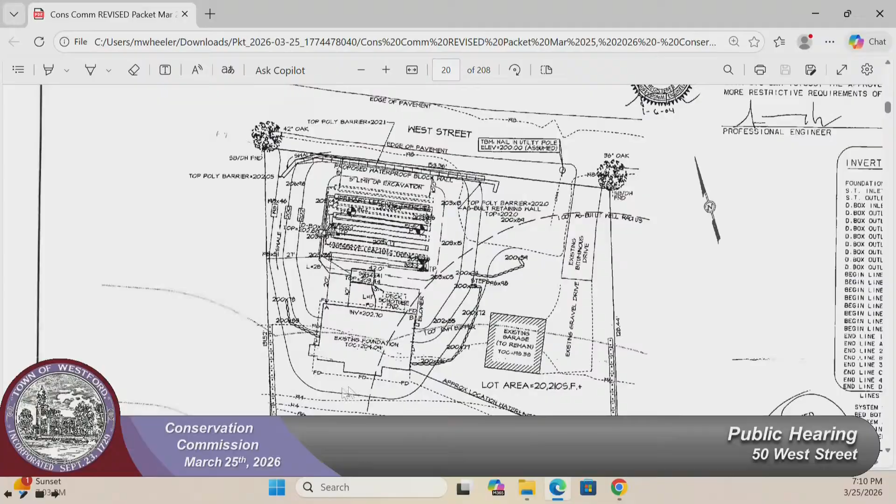Okay, so I've got the plan up. It's about 55 feet for the buffer. What is this line? Is that the 100-foot line?

I don't have that — this is the 100-foot line. Let me see, hold on a second. The 100-foot line looks like it goes up through the garage. Yeah, so this looks like the 100-foot buffer. Oh yeah, okay.

So currently, right now, in the back of the house there's a small landing with a set of stairs coming down. The proposal is to add a small deck, a little bit bigger than a small deck, on the top side, using helical piers instead of digging with concrete footings.

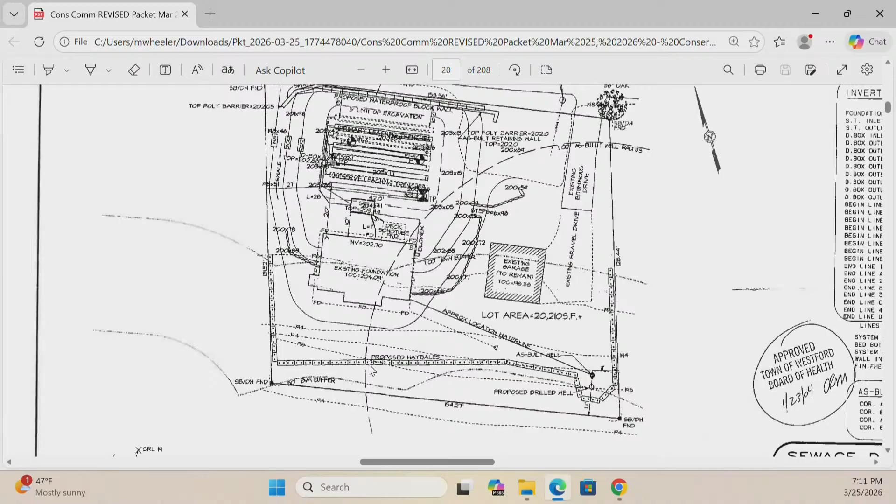So it's the least amount of disturbance to the ground as possible. Is that the 50-foot buffer right there? That's what it looks like. So he's well out, like 20 feet out, on maintained lawn right now. Yes, it's just lawn, and that's not gonna be disturbed. We're not gonna put anything there, no gravel, nothing like that. There will be a small pad for the bottom of the stairs, that's it, a concrete pad.

In terms of what will be underneath the deck from a ground surface perspective? Just grass, okay. Where will the building materials be staged? And the driveway, which is in the front part of the house. Had Matt talked with you? You have the proposed hay bale, so you're all set there. I don't believe we're gonna have a dumpster because the product is minimal. So we'll be getting rid of that, so that'll be one less thing.

Any other questions from members of the audience? No. Sorry, any members of the commission?

It's not really a conservation one, but I know that in the back of the library, the stairs that go up into the main entrance to the library don't meet the code. I'm wondering how many steps, or what kind of height on the stairs? The stairs are 7 1/4 on the step, so the maximum step could be 8 1/4. We're at 7 1/4. No, I mean the total height from the top, or the number of steps? There's 12 steps.

Right, but it's the height—there's no height shown of how high the deck is from the ground. And there's no landing on the stairs. There's a landing at the very bottom. But there's no landing for a turn, so you have 13 or 14 steps. There's 12 steps.

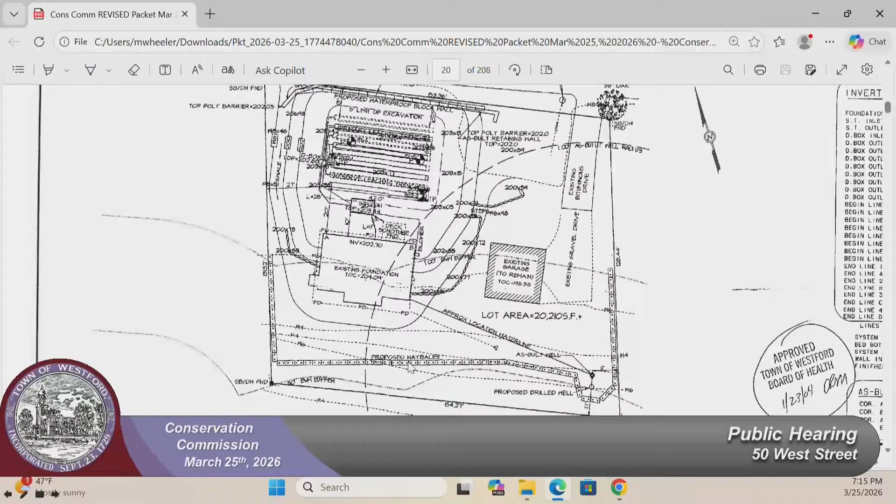And currently there are steps there, and we're just basically reproducing the same steps—the same amount of steps, things like that, that's currently at the house. We're just bringing the deck forward, and the steps will be coming in front of that structure, so it'll be going into the deck more than it is currently.

Are there any comments or questions from members of the audience? No. Let's see.

So you're looking for a motion to approve? I'm looking for a motion to issue—I just don't remember whether this is a conditional negative or just a straight negative. Jim, when you write it up, was this a conditional, or was this a straight RDA? Okay, straight RDA. Can I have a condition? The only thing I'm gonna write about it—the silt barrier's already there, yeah.

Okay, and we can do that—we can put the straw bales there, the swales, or the silts. They're on your plan already, right? I'm not sure if they're on the plan. Well, it's shown here. Proposed hay bales, yes. From the old plan, maybe. They're on your plan, yeah. Let's see if Matt's given me any conditions.

Okay, so I would say there are no conditions listed, so can I have a motion for a negative determination? Okay, so moved.

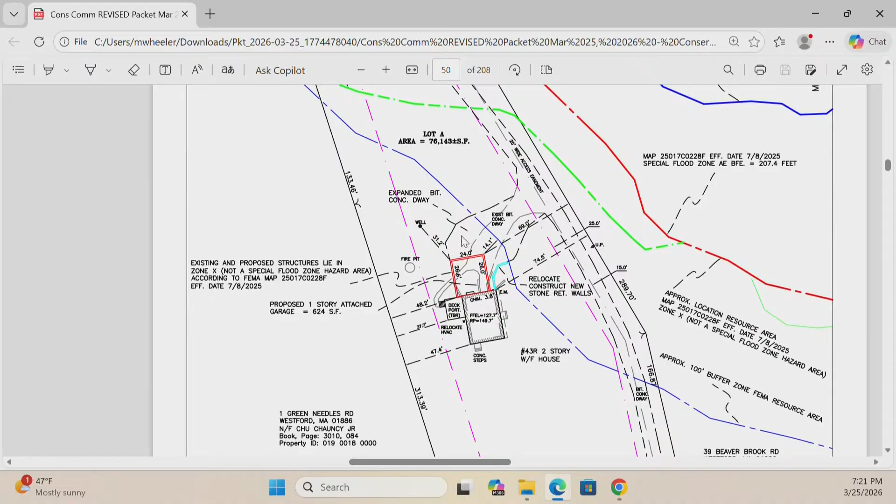Okay, so it's the changes to your driveway rather than the building construction itself that is the reason for the public hearing or for the filing? Correct, yes. It's just the extension of the driveway, and the driveway will be extended into previously disturbed land, which is currently a lawn. Okay.

And had Matt discussed any conditions with you regarding, for example, putting up erosion control or anything like that? Yes, so we will install erosion controls such as silt fencing during the construction and maintain it until the site is stabilized. Okay.

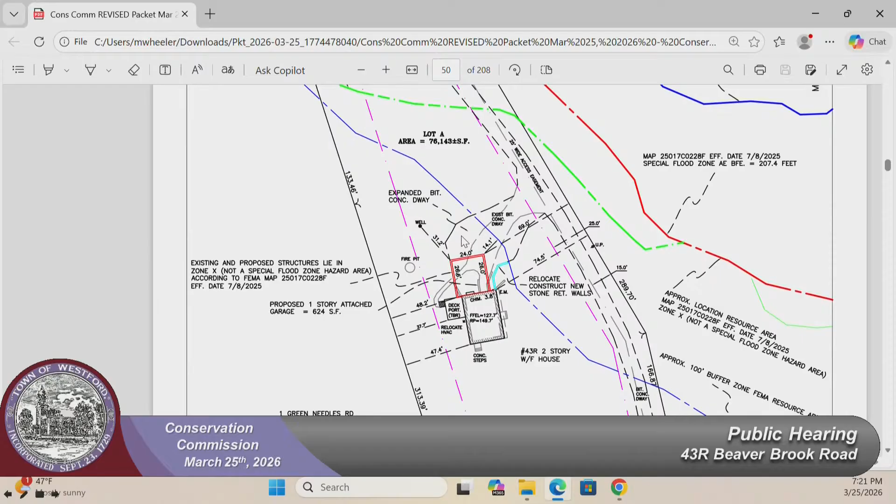Are there any comments or questions from members of the audience on this project? Where are these erosion controls? They're not shown on the plan, but what we could do is if we issue a conditional negative determination, then Matt would include the condition for erosion controls to be installed and inspected prior to the work beginning.

Okay, so can I have a motion to issue a conditional negative determination? So moved, second, all those in favor? Aye. All those, may I have a motion to close the public hearing? So moved, second, all those in favor?

Aye. Okay, so Nicholas, Matt will be in touch with the paperwork. That's great, thank you very much for your time and consideration. Thank you very much. Thank you as well.

Jim, can you click the end call button on the phone, please? Thank you, have a good evening. You too, good night, goodbye. Okay, I think I said goodbye. You're not there anymore, right? All right, good, it's all right, it's all right. Okay.

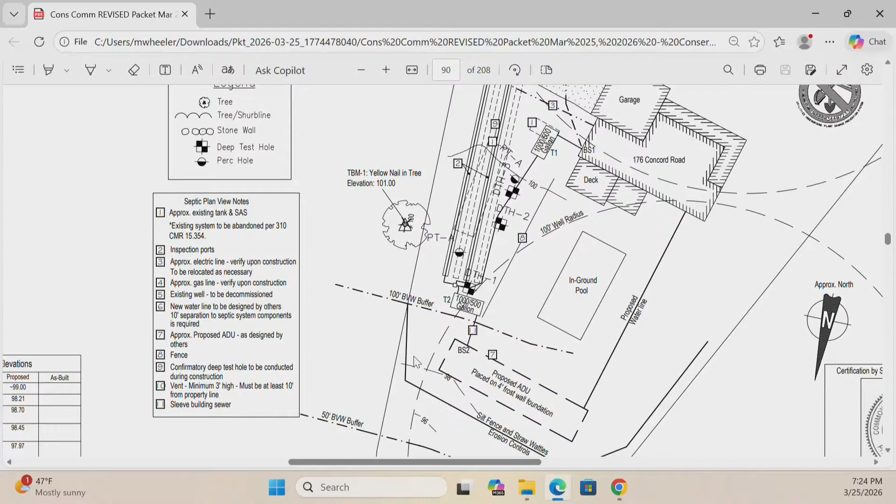What we have is a notice of intent for the construction of an accessory dwelling unit at 176 Concord Road. I went out and delineated a bordering vegetated wetland, which is essentially the lot. It's a triangular shaped lot. There's a large swamp behind the property. Where the lot comes towards the swamp, there's actually a steep slope, and the wetland is down at the bottom of the slope.

You can see, I don't know if this thing works. Is this a pointer? Yes, it is. I don't know if it works. If it works, there's a green dot. Yeah, I saw the green dot, I just don't see it on the screen. Oh, there it is. Okay.

So we have the bordering vegetated wetland here. We have your 50-foot buffer zone here. We have your 100-foot buffer zone here. This line right here is an erosion protection barrier. There is a detail on the plan showing wattles and silt fence that would be placed as the erosion protection, going around the shape of the work.

The septic system, with the exception of a small section of the main going out to the tank, is out of the 100-foot buffer zone. Here is the leach field. This septic system has been approved by the Board of Health. The condition they put on it, probably in connection with a comment Matt made when we reviewed the plans together, was that he wanted this area sleeved. So the Board of Health permit requires that main be sleeved, which would provide extra protection against any leakage within the buffer zone.

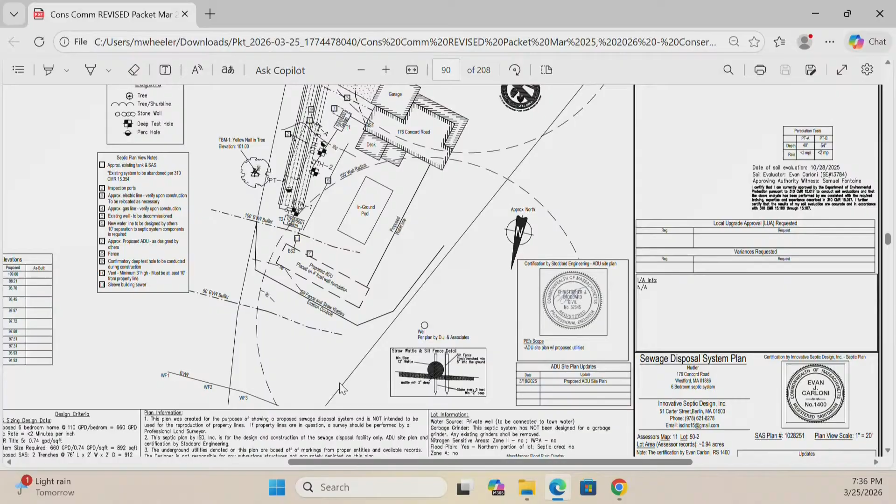It's not really—also, I'd remind you, this square right here is an in-ground pool. So now you're tweaking the ADU up closer to the pool, and it creates more issue than what it would actually resolve. Actually, how does that create an issue? If I bring that proposed ADU closer to the in-ground pool and outside the 100-foot buffer, I don't see what the issue is, other than aesthetics.

How do I put a porch on to get into the ADU? Well, right now, I can see this ADU being moved up out of this 100-foot area and being connected into the septic line without issue. That way it meets our regulations. So that would be my recommendation.

So from the pool to the ADU, you got about 12 feet. The ADU to the first box - that pipe can't be more than 12 feet long. Isn't it 30 or 40 feet long? No, it can't be more than 12 feet long. The ADU is 16 feet.

I don't see why he can't move the ADU up and bring that pipe right to it and be outside the 100. I guess that's what I'm missing. Is there an offset that would require the structure and its slab to be a certain distance from the septic or the leach field?

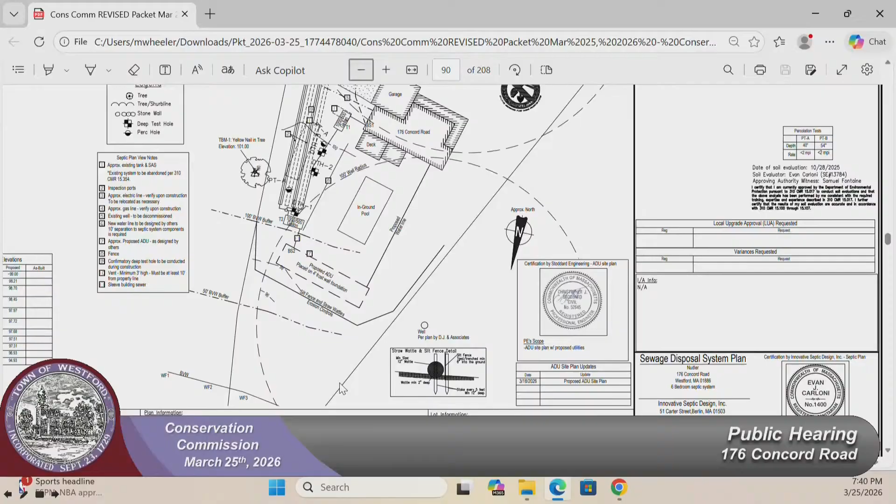So you're saying the location of the ADU meets the required offset from the in-ground pool to the structure? Correct, and the required offset from property lines, but again it's very close. If there was anything we had to move, that's going to be a discussion. This is why we brought Eric, our general contractor, here as well, to give insight, because he's the expert.

So on the left side of the building, according to the existing plot plan and where they want to put it, the setback is 15 feet - they have 15 feet 1 inch. So this is 15 feet 1 inch here. On the other side, I believe it's 15 feet 6 inches.

Because she's right, the property is shaped like a cone - the farther back you get, the tighter it gets. So for the offset for the pool, and for the offsets to meet the current town code, that's exactly where the ADU fits - it's the only place it fits.

And you said the offset from the pool to the ADU had to be 10 feet? It has to be at least that. Okay, so when I'm looking at that - I don't know if this is to scale, 1 equals 20 - but if I simply slid this up to the corner, so this corner was outside the 100, so you could hook it up.

To me, that almost seems like you've got your 10-foot offset, and then you're sitting on top of the tank. Then you'd have to move the tank around, which means you'd have to move the leach field. The tank - so you start moving that stuff up to get that line out of there, you affect the placement of the tank. Oh, so that's the septic tank.

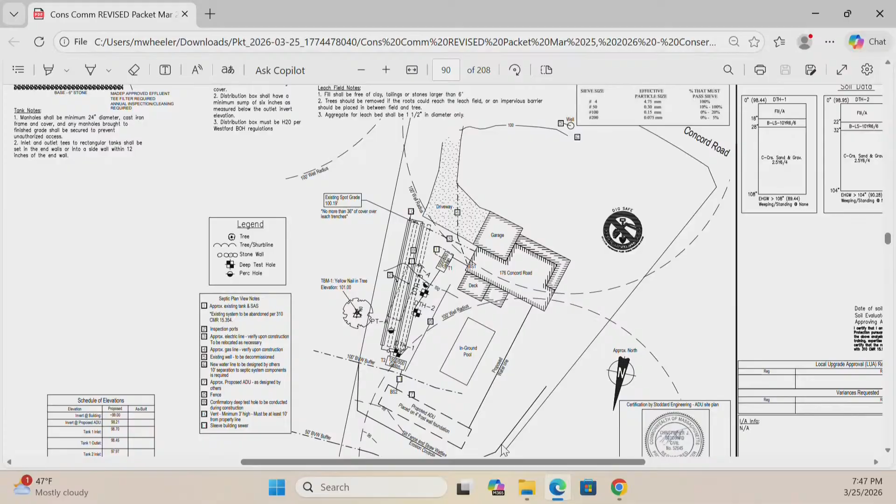No, I'm talking more about the times we've done components of the septic system inside the 100-foot buffer, and it's usually been a septic replacement. So yeah, it's usually maximum feasible compliance for an existing structure, not a new structure, as is the ADU.

Typically we would have narrative stating there was no other place this could be put, and this is why the ADU had to be here, and why we have to provide relief or accommodation. So what you're saying is it would be helpful to have a write-up of all the steps they took trying to locate it elsewhere.

A narrative of all the other places, basically an alternatives analysis. A narrative of the steps you already took to see if there was a way you could have it outside the 100-foot buffer. It's a rationale, pretty much everything you said.

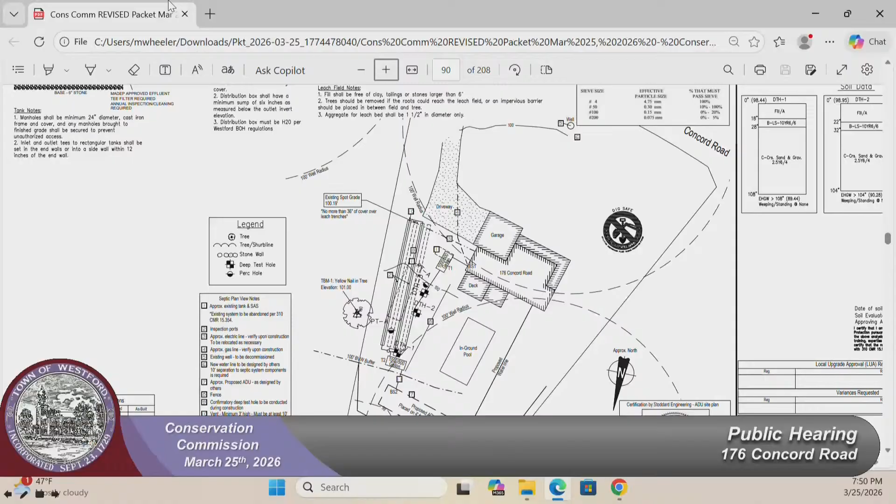Which means you do have room to move this up without getting closer to the property line, and it leaves more room here, so if you wanted to, you could move the ADU closer. Moving the ADU closer increases this distance, which you said was a concern, and increases this other distance by another 6 inches, which is also a concern. So I think, given that well is going away and that 100-foot arc is also going away, you have the room to move the septic system south, parallel with the property line, and then move the whole ADU that distance, staying out of the 100-foot buffer completely.

That would have to be something I'll ask the experts about. I'll review that with Mr. Carloni.

That's appreciated. I'll review that with Evan, the septic designer, regarding the elimination of the well. I'm sure he took that into consideration when he designed that system, but there's likely an underlying reason why it's there, regardless of the decommissioning.

We'll find out at our next meeting. If that's so, it could be in your narrative. Agreed, we're all on the same page. So you would have done due diligence in checking it out, and we'd like to have that paper trail as part of the filing.

Because next week somebody might ask about this, and a year or two from now, elections fade, people come and go. If we don't have that narrative as part of the file, we're in trouble. With my commission, I like to say if we get hit by a bus the next day, we'll have a record of what really happened. It might be a little painful, but it'll work through.

So I don't remember whether I asked, so I'll ask again: do any members of the audience have comments or questions on this project? No. Okay, so we would continue to our April 8th meeting.

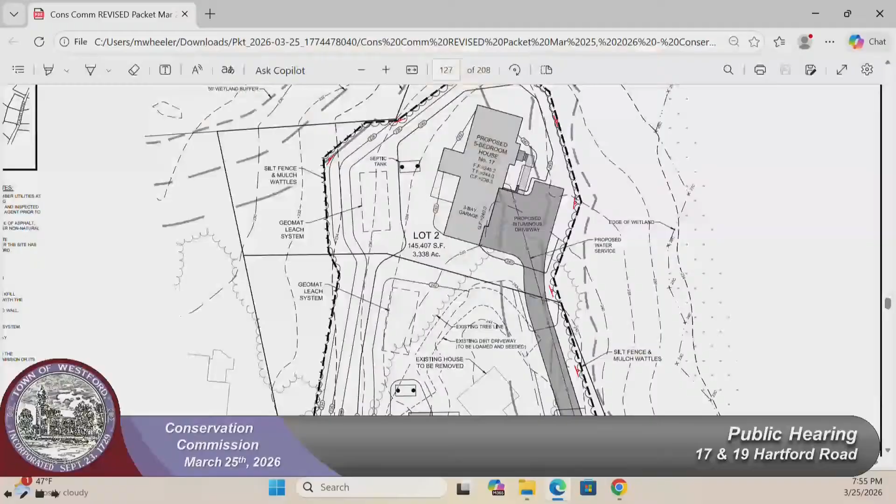Good evening, Mark Slager from Alan Engineering, here on behalf of Premium Homes. You may recall we were here last fall requesting a determination to demolish the existing house at 19.

And the thing here isn't working. I think Matt wore the batteries out. You want to borrow mine? Oh, you have one, all right. Which button? The red one. There we go, so this is the house. If we had a bigger screen, we could scroll down to Hartford Road.

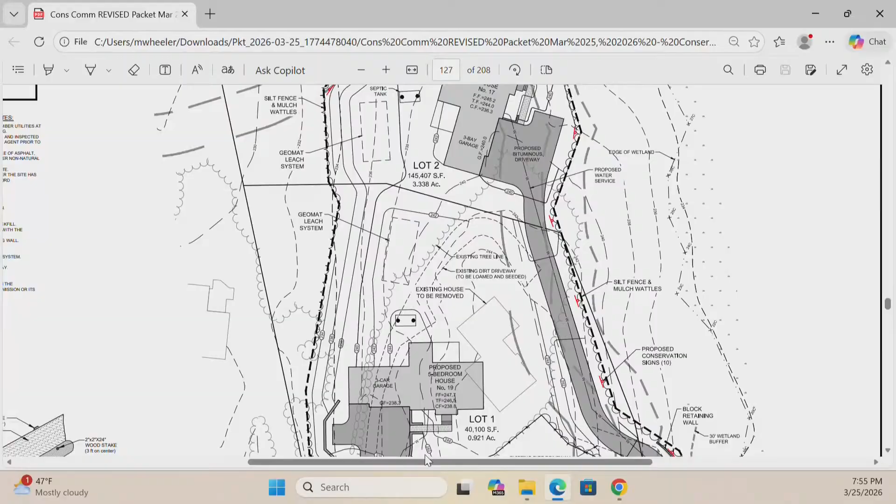So we have an existing house right here at house number 19. There's an existing driveway up and around right through here, and another existing driveway that goes off into this side of the house. Both were actively used when the house was occupied.

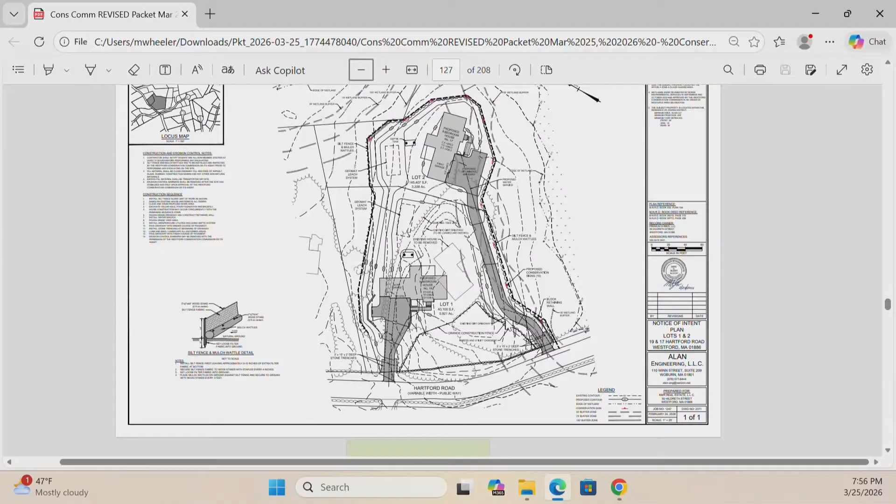What we're proposing, we did an ANR plan last year, possibly the year before, carving out 2 lots. We've got 200 feet of frontage for each lot, so we meet the zoning for each lot.

What we're proposing is to construct 2 new houses after demoing the first house, using the existing driveway for each house. There's an existing driveway here and here. We're utilizing that as much as possible, then creeping onto the lot so we maintain the 50-foot no-disturb buffer, shown by this dashed line, for construction of this driveway.

In here, where it's already an existing dirt driveway, we will be within the 50-foot buffer, but it's previously disturbed, so we meet the 30-foot setback, which is right here. We'll quickly get outside the 30 and then well beyond the 50 out to here to service the house.

The septics for each house is one septic here and another septic here. Both will be served by town water. Currently, this house is on a well that will be decommissioned, same as the septic tank and septic system, which we believe is over here.

We don't really have great records of where it is, but during demolition of the house we will recover the location of the tank and decommission the system in accordance with state and local regulations.

There'll be a new water service coming in off of Hartford Road up to here, and another coming in following the driveway up here. We'll also be using underground electric for the first house. I believe there's overhead electric already on this one. We're not sure whether it'll remain overhead or go underground here as well.

The total disturbed area is just under an acre of land. So we have the silt fence around here, and in the front yard we have orange construction fence that will go in here just to make sure we don't disturb more than an acre.

We've had this situation in one other filing where the tree clearer wasn't as careful as he should have been. So we're proposing orange construction fence, and I'm going to go out and stake that myself, or stake out where it goes and inspect it before they do any work, just to make sure we maintain under an acre of land disturbance.

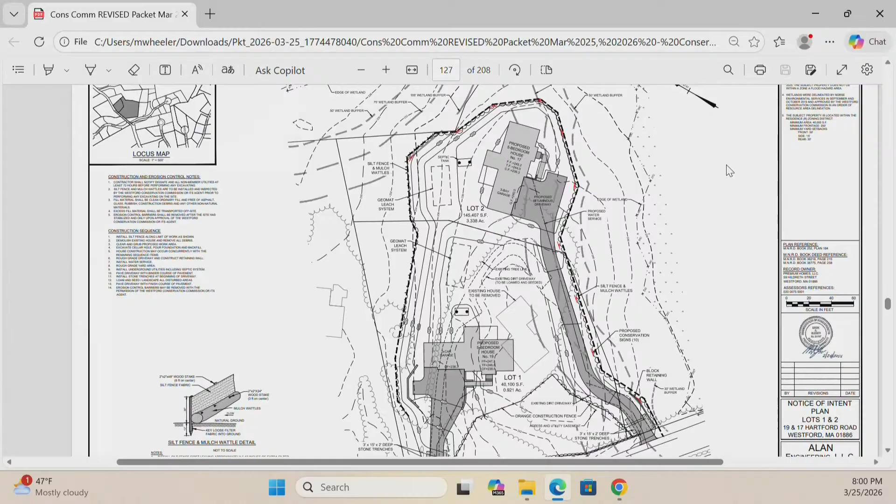Now, how densely is that wooded? Is that larger mature trees, or more understory? I think it's a mix of both. It's mostly mature trees, but there is some understory established as well.

Is there any plan for replacing any of the trees, if that's what the commission wants? Yeah, I don't know. I mean, we'll probably do some additional plantings.

This is the 100-foot buffer right here. Most of the work is going to be outside the 100-foot buffer. So we've got a 75-foot buffer here and a 100-foot buffer right in through here. This is where most of the tree clearing is going to occur. Out in here, we're outside the 100-foot buffer.

That's why I only asked how many inside. Can you get a count? Can you get a count? Sure. Well, what's the minimum caliper you want them to count?

Well, in looking at how close the tree line is to that driveway and portions of the dwelling as well, you have to wonder if that's going to come back to us later. Is the developer fine building that close to the large trees?

But the homeowners might have an issue later on, especially thinking about this past winter and the health of large trees. I think the way to handle that would be, once we get the erosion controls staked out, Matt and I could walk it, possibly before they put the silt fence in. And if we need to go around some trees and move the driveway further away from the wetland, we do have plenty of room.

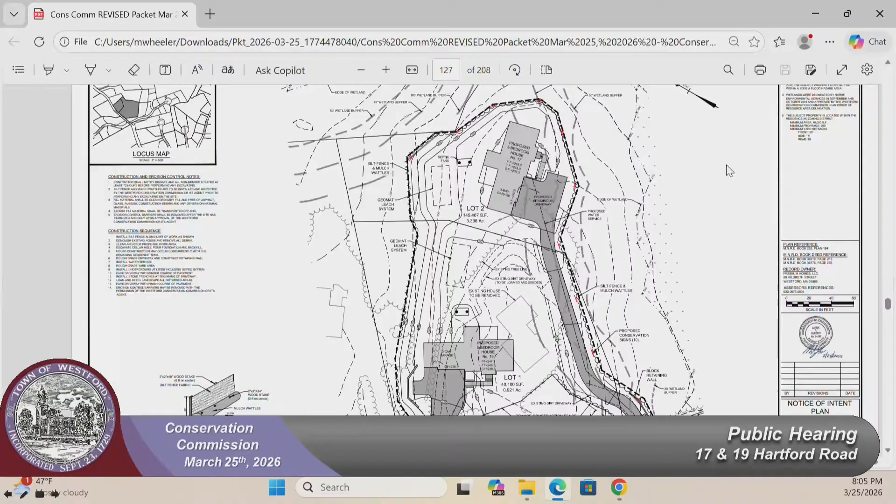And then I provide an HDPE barrier. That way you don't have to go 15 feet from the system to start your slope, you can go 5 feet, so you save quite a bit of fill on the downside. These are basically a 1-inch thick mesh with a sleeve for a pipe to go in, and the leach lateral disperses through the mesh and then goes into the sand. So the mesh actually replaces the stone.

So if you had to replace it, you would simply pull out that system and put another geomat in? Yeah. And these systems, in order to prove that you can use a geomat, you have to prove that you can fit a conventional system on the lot with the same capacity. So there is room to put a conventional system in. I proposed a geomat because it takes up less space, there's less clearing.

Life expectancy is kind of the same equivalent between this and a typical system? These are about, I think, 40% smaller in footprint. About life expectancy, I don't know if they've been around as long as the stone and pipe systems. It's more a matter of the soil, and the soil here is pretty good, like 3 minutes an inch, 5 minutes an inch.

And it's more a matter of maintenance too. A lot of times people use more water than the system can handle, or they put in a garbage grinder, and then when it fails, they take it out. No problem, just, yeah, I was curious.

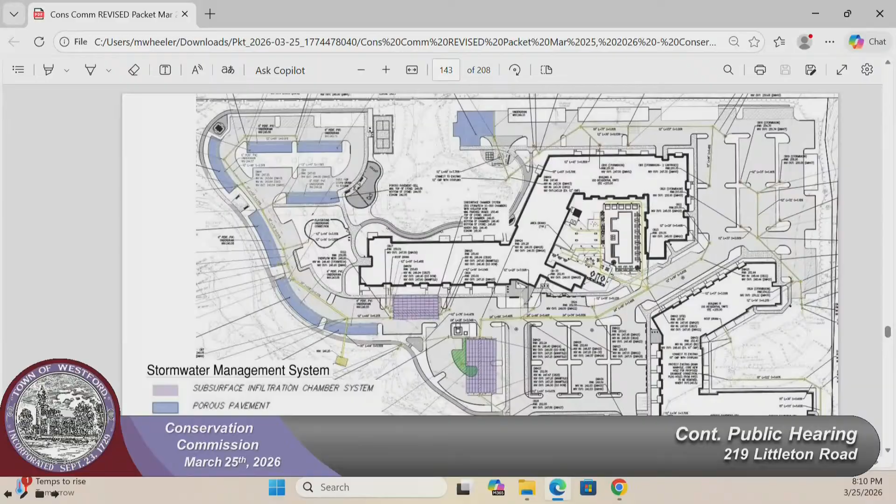Okay, so I'll do an overview of the stormwater system again, just to remind us all about the design, and then I'll talk a little bit about Tighe & Bond's peer review and where we've gotten so far with that. A reminder that this site is a redevelopment under the Massachusetts stormwater standards. That is because the project will decrease impervious area. We have about a half acre less of impervious area in the proposed condition than we do in the current condition. That does not take into account the areas of porous pavement. For the purpose of our design, we considered those to be impervious, so we went kind of conservative there, and we didn't account for surface infiltration in our model.

So there are several components of the stormwater system, which was really designed to fit the constraints of the site. As you know, this is a very wet site, there's a lot of wetlands on the site. Related to that, there is high groundwater. So that kind of put a limit on what we could do for stormwater recharge BMPs, just because of the vertical depth available. So where we could, shown in purple on this plan, we have systems of underground chambers.

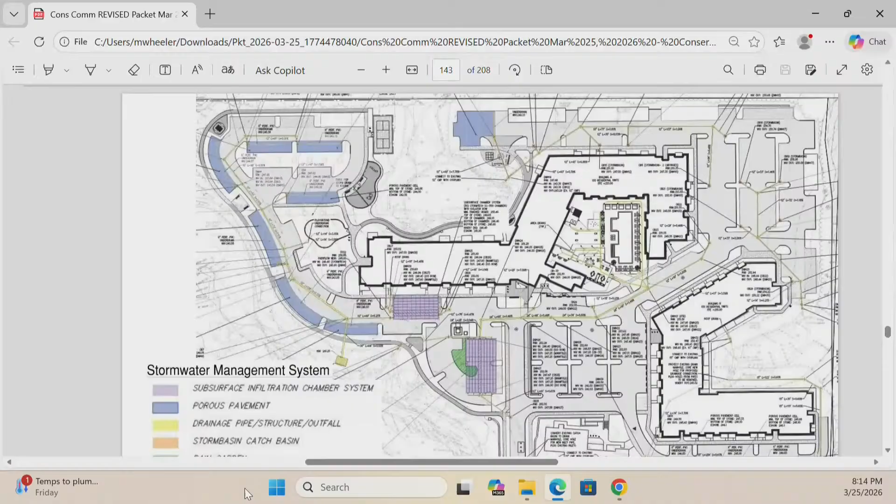We do have a rain garden proposed in green, which is here. We located it there because we could. The other landscaped islands were either over the proposed effluent field, or in areas with mature trees or steeper slopes. So we put the rain garden where conditions were allowable, so that's the traditional planted rain garden. There'll be surface runoff into that, and overflow from the rain garden will drain to the chamber systems.

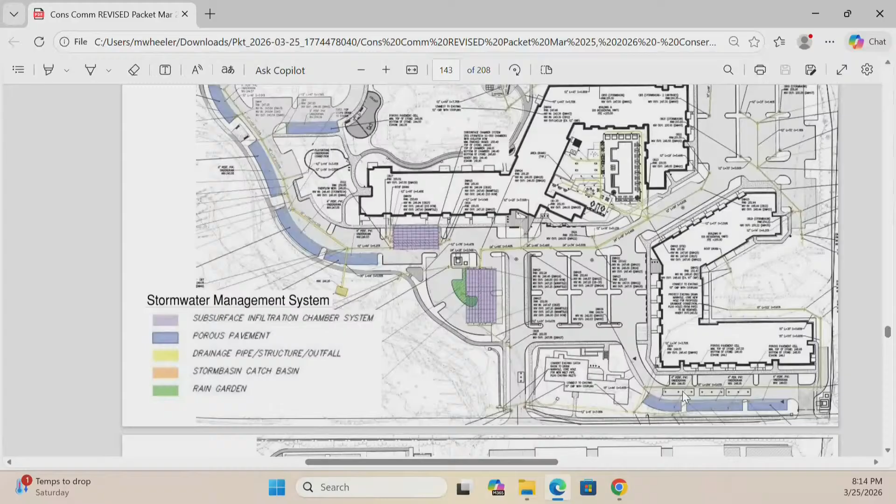Lastly, in the upper right corner of the site, this is where we have the highest groundwater. In that location, we weren't able to get the separation to groundwater under porous pavement there. So what we did is provide catch basins with filtration inserts. Those filters can address the needs for phosphorus and nitrogen removal, as well as total suspended solids. They're a little hard to see, but those are the orange dots up in this area.

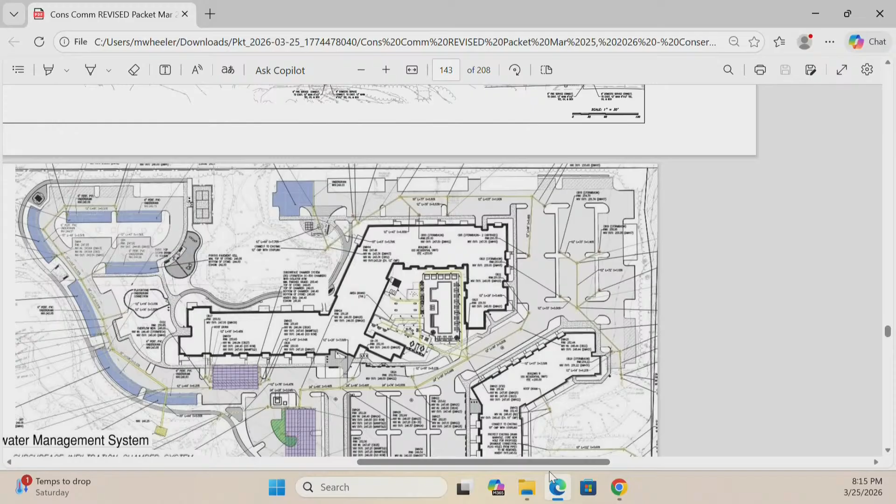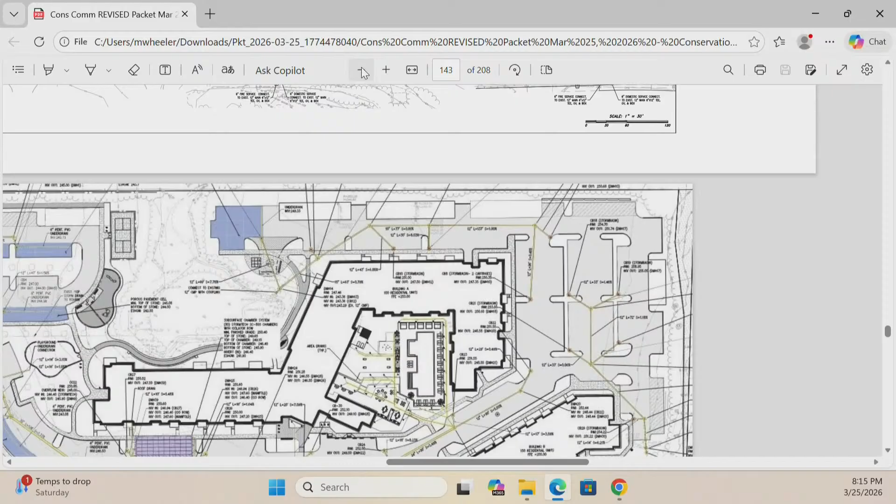We designed the system to try to mimic the existing drainage patterns on the site, so we tried to approximate about the same amount of water that goes to each wetland. We divided up the site intentionally that way so we don't alter the conditions of those wetlands. The three wetlands are connected — the one on the Cornerstone side and the one central to the site have existing piped outlets to the wetlands associated with Vinebrook.

I'll talk a little about Tighe & Bond's comments. We met with them last week and had a very productive meeting, and we're able to address all of their comments on the stormwater system. Some of those were providing more clarification on the site conditions, such as groundwater and subsurface soils. We will be adding a few drains at their suggestion. We also adjusted our stormwater model to reflect a larger storm event — they asked us to use slightly different data than we had been using, which bumped up the inches per storm by about a quarter inch for each one. So our system is able to accommodate those.

So that's it for stormwater. I'm happy to answer any questions you might have on that before we move on. Any questions on the stormwater?

One of the things that's important is that pervious areas require maintenance so they stay pervious over time. How do you do that? What actually happens to remove the silt and sand that clogs up the pores? One thing is being careful about what you put there — these areas would not be sanded, but they get vacuumed periodically. It's a vacuum system that pulls out the dust and dirt.

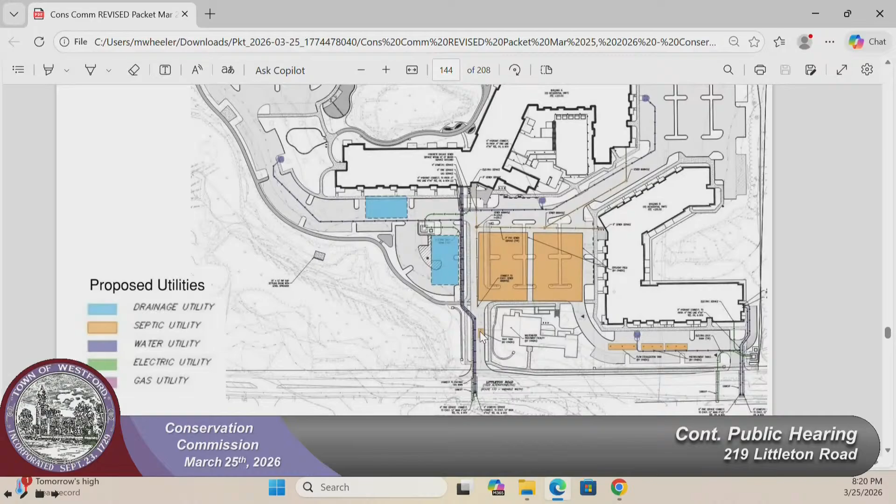I think we talked a little about this. There will be an on-site wastewater treatment facility. The site conditions for that have been approved by DEP already, and the design for that system is underway. It'll generally be in the location shown in orange on this plan. These are tanks related to the system here and here, and these larger orange rectangles are the effluent field. When that design is complete, we would provide that tie-in bond, as well as having DEP go through their approval process for that.

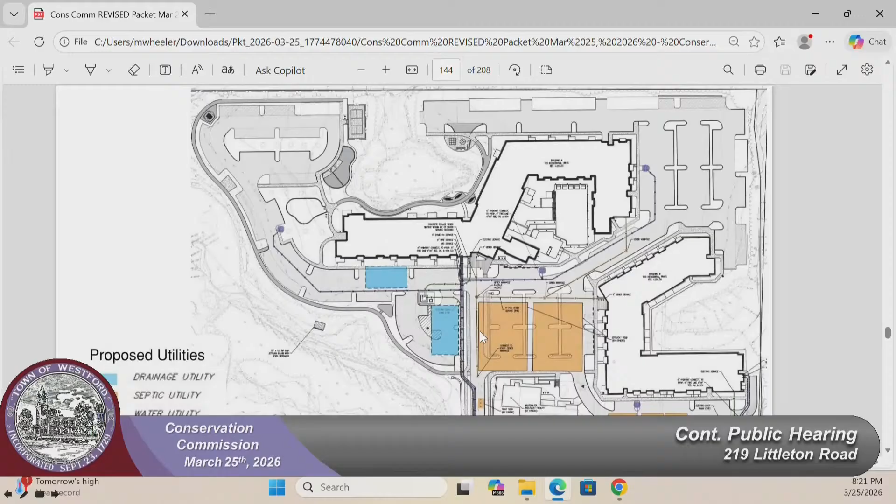We have water and electric services coming in from the street, like you'd see for typical projects. One run of services is through here, with a transformer over here, and the second run would come into this building over here. So nothing too exciting about utilities on this site, pretty straightforward.

Ready for me to move on? Yes. Okay, which slide would you want me to go to next? This is good. Okay.

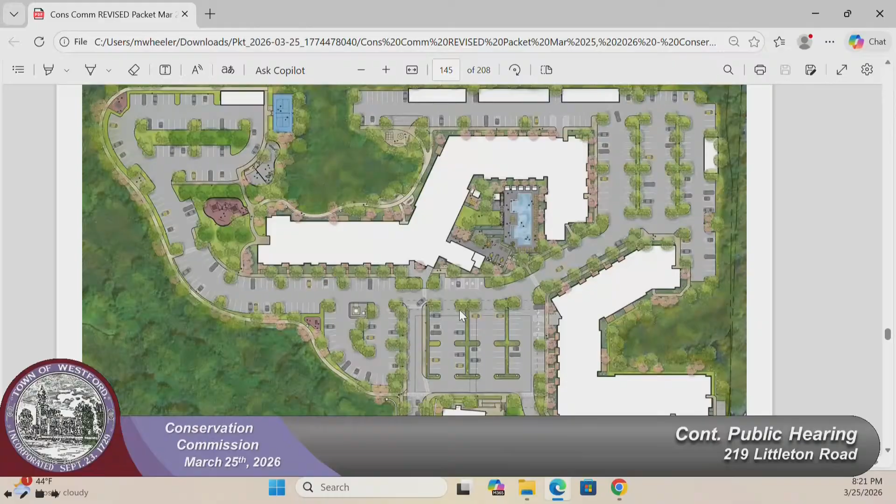I'm here tonight to talk to you a little bit about the architecture and the sustainable features of the project. And this is our rendered site plan.

Just for the record, can you remind us who you are? Yes, my name is Bridget Doherty, and I'm with Arrowstreet. I'm the architect and project manager.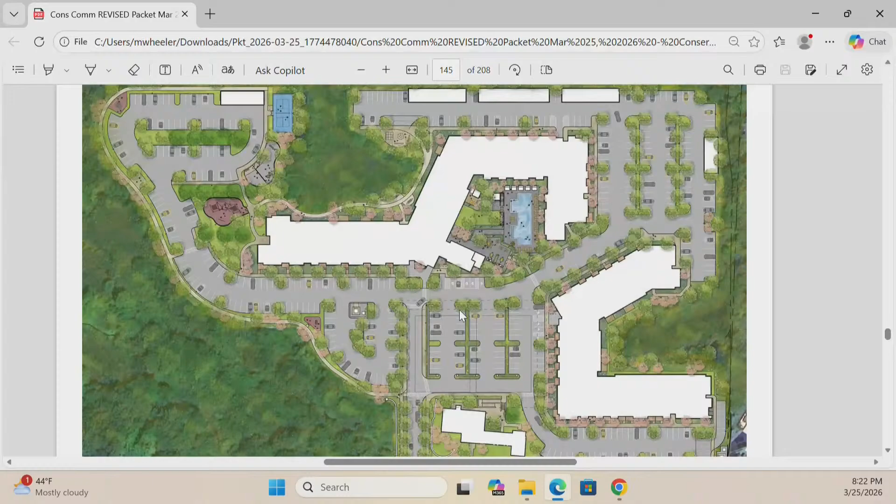Thank you. As you can see from our plan here, the buildings have been designed to really weave around the natural features of the site. They're designed to preserve and provide breathing space to the wetlands, preserving the groves of old growth trees we have in the northwest corner here, and preserving the really important trees on site. The buildings have been organized to provide as many views as possible for residents out to these resources, to the wetlands, really along the backs of the buildings, opening up to enhance and express the value of those spaces to the residents. We've been working very hard, and continuing to work hard, with Copley Wolff and Hancock to design a site that is really sensitive to the existing features here.

No, just go to the next one. Yeah, I think you can go to the next one too. Okay, yep.

So the design of the exterior and the architecture is really influenced by the existing barn and Greek Revival farmhouse that are on site today. You can see that we've taken a lot of inspiration from the gabled roof forms, the dormers, the lofted spaces. This is a picture down here of inside the barn, and this is the barn here. We've done this in a modern interpretation.

A rendering of the building is down here in the lower left corner. So we're using materials such as natural wood and a neutral color palette to really provide a backdrop to all the landscaping that's going to be part of this project. Move on to the next one.

Can we go back up? Sure. I just want to know what the colored lines are. Yeah, I can describe those. Yeah, I was curious.

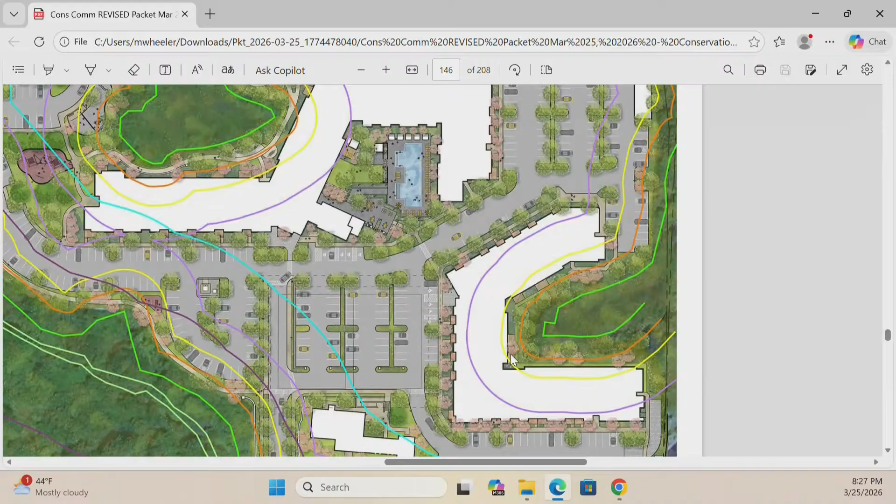So just briefly, along the back of what we're calling Building B, we have removed the walkway from there entirely. You are still seeing some rectangles off the back—those are decks, but they have railings that will wrap around and essentially contain the individual residents within that space. There are no steps down into it whatsoever. That has hopefully been perceived as simplified, but all of that was taken out, and a lot of that honestly came from comments and feedback. We were really responding to what we're hearing from you guys.

I can go through some other changes we made after Bridget had a chance to talk through the architecture behind Building A—keep it simple and clean. So Eric, was there anything more you wanted to talk about on this slide before we go back to the subsequent pages? Not at the moment.

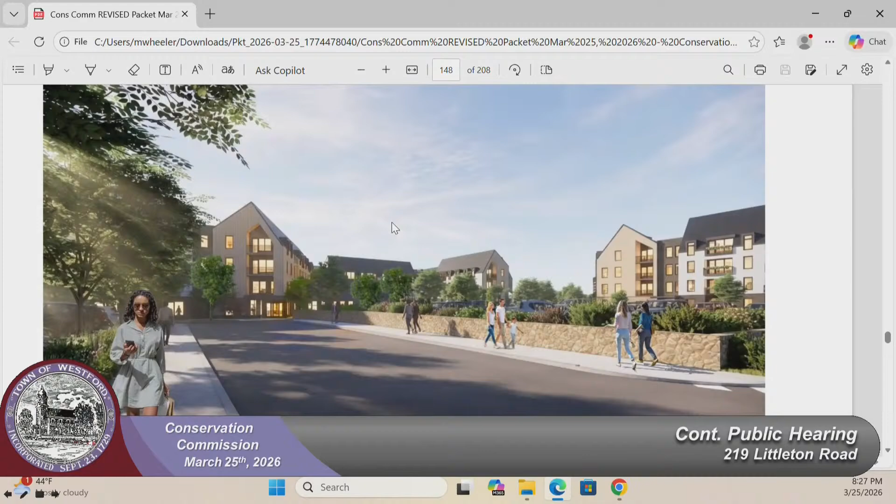So this is where we left off. This is a rendered view from the entry drive, taken from the perspective of a pedestrian on the sidewalk. You can see how we have used the expressed gabled ends to denote the entrances. The entrance to Building A is straight off in the view, and the entrance to Building B is over here to the right. We're also breaking down the scale of the building by creating these breaks in the roof forms, which helps break it down into smaller forms within the landscape.

So it's 4 floors? It's 4 floors, yes. And what is it currently now—the Regency? I think it's 3. No, 4, it is 4. There's a fun history about it too, Eric, we can talk about later.

You can go to the next slide. This is just another similar view taken from the entry drive, but from the point of view of the vehicle. You can see how the street trees and landscaping on the left, and the trees off to your right in the distance, are really shielding a lot of the building and making for a nice pedestrian experience here.

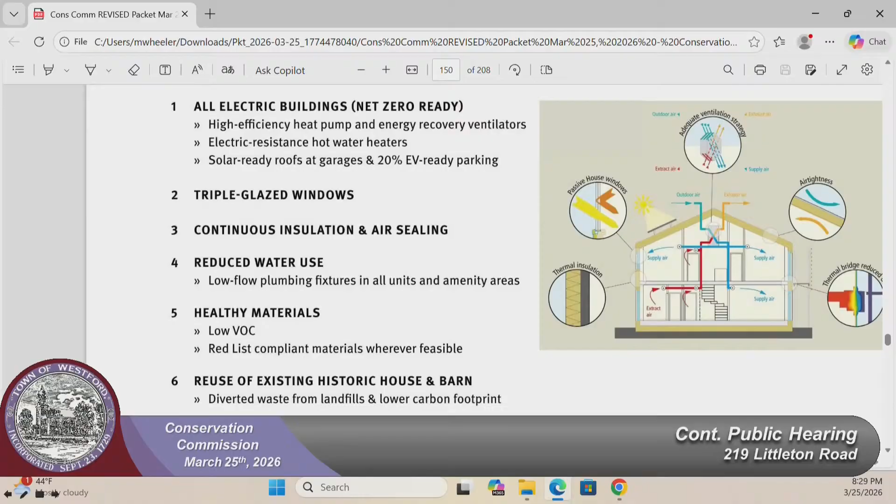So some of the sustainable features of the building—one of the most notable is that this building will be all electric, which means it'll be net zero ready. There will be high efficiency heat pumps and energy recovery ventilators for fresh air. The hot water heaters will be electric resistance instead of gas fired, and the roofs at the garages will be solar ready. We'll have 20% EV ready parking on site, and a very high-performing envelope with triple glazed windows, continuous insulation outboard of the framing, and air sealing. We're reducing water use with low flow plumbing fixtures in all residential units and common spaces. We think it's very important to always select healthy materials so they have low VOC, and we have very good indoor air quality.

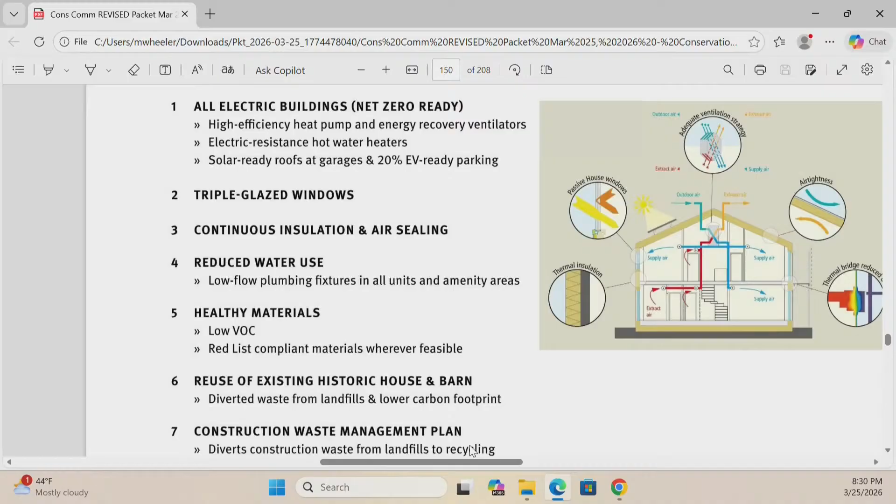And we look for materials that are Red List compliant, looking at the ingredients and making sure we're not selecting ones that are banned on the Red List because of the chemicals. And since we are reusing the existing historic house and barn, we're inherently diverting waste from the landfill if we had been removing it, and we're lowering our carbon footprint by not building something there in its place. And we will have a construction waste management plan with the contractor, which will divert a portion of the construction waste from landfills to recycling facilities.

So only the garages will be solar ready, why not the building roofs as well? They're not all, it's harder to control the orientation for optimal use with the slope and the snaking condition of the building, but with the garages, because we have the flat roof, we are able to, those would be more conducive to orienting the PV panels, and because the back side of the roof will get a lot of shade from the sloped portion, it would really shade the solar panels on the back flat part of the roof.

And why is it only solar ready and not solar happening? That's just something that we always work with the client on, and that can certainly change at any time.

And last question, how much energy - well, I guess it will depend on when the arrays actually go in and what their capacity is - but what is the anticipated energy, like how much would just the garage roofs produce? We haven't calculated that, but we can get back to you on that.

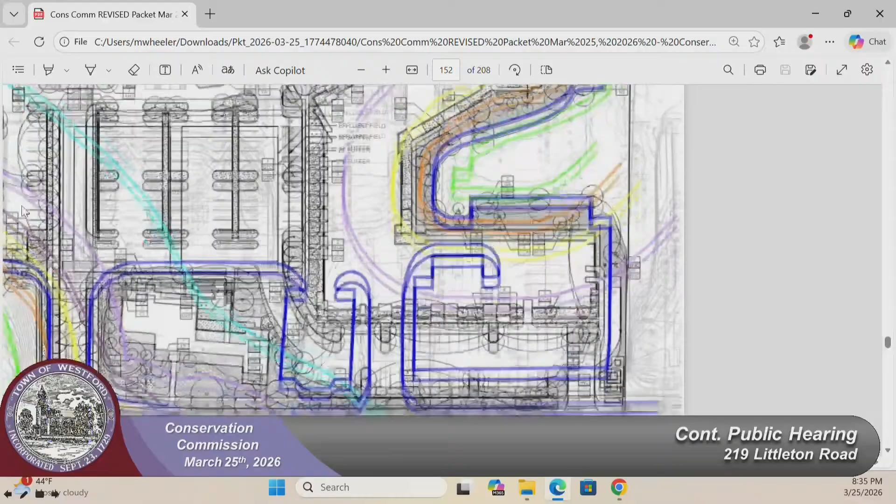We do have a planting list. Actually, this one, Margaret, is completely labeled - they're all labeled. And then if you go to the next page, there is a plant schedule that goes with that, right there. Yeah, it's gonna be really hard to read. No doubt, and it was in the revised meeting packet. So yes, what you're saying is that if theoretically we look at the planting plan, we can see a code that tells us which tree is being - yes.

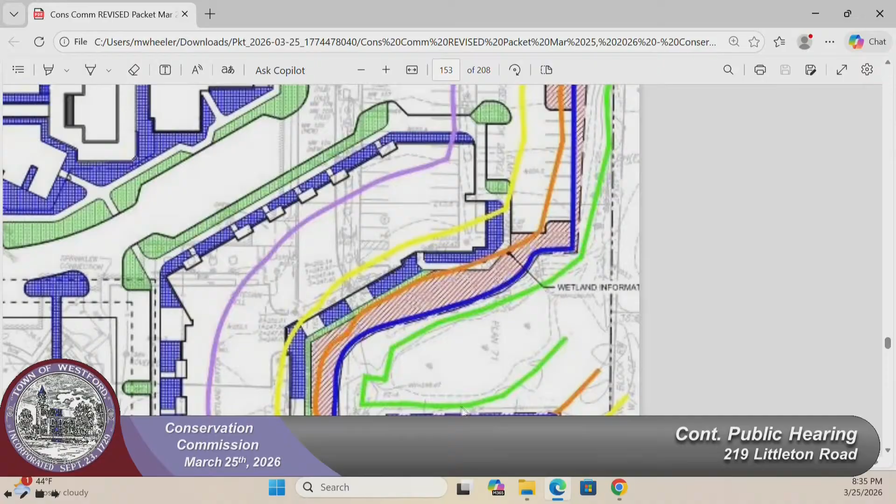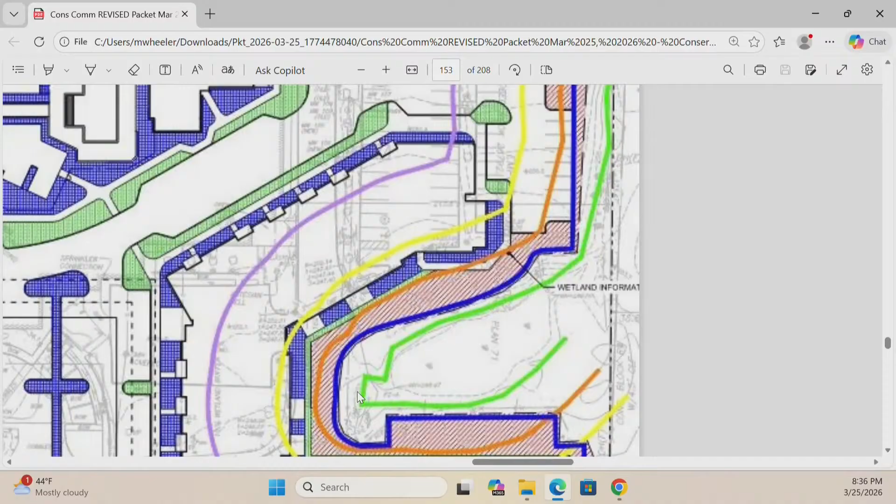So one of the things that I keep coming back to is when we look at the existing condition plan, on both sides of this wetland edge, there's an existing wooded area that is not shown on these plans. In terms of understanding what existing wooded vegetation is going to be left, a lot of what we like to do is leave the native vegetation that's grown in place, because that's got a head start on everything. That's stuff we know already likes where it is. So every time I look at these plans and don't see that existing edge of woods on it, it's something you want to see.

We can make sure that line is on there, bold enough that you can see it, because it just... that existing wooded edge. Oh, this might be a good time.

One of the things that Matt had been talking about is doing a site visit. We could add it to the plan, but now that all of the snow has melted, it'd be good to get out there on site so we can compare. We could schedule that at the end of the hearing if the commission would like, or do it after through your agent. Matt had been talking about April 7th, which is a Tuesday.

His thought would be that he'd be reaching out to commission members to find out what times work for us, reaching out to you to find out what time works for the applicants, and also see if we can partner and get the planning board to come with us as well, so it's a joint site visit. So that's something we've got planned.

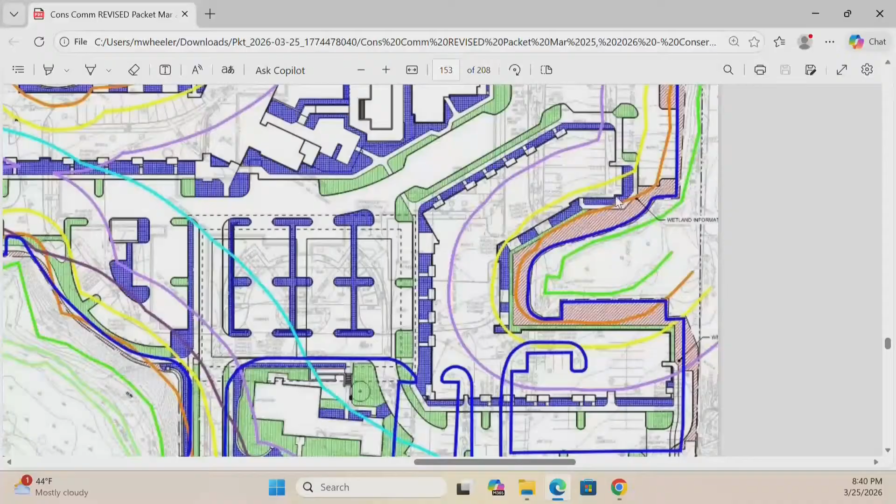So would you say the corners of the building closest to the wetlands, as opposed to the backside farther from the wetlands - from our perspective, we're interested in the proximity of the building to the wetland and being able to visualize that. So being able to get a rough idea of where the edge of this building is going to be, and then the edge of that building, and kind of where the walkway is.

When you say walkway, are you referring to this pathway, the wellness path? Right. I think we could paint out a few points along the way, just so we can orient ourselves out in the field looking at the plants.

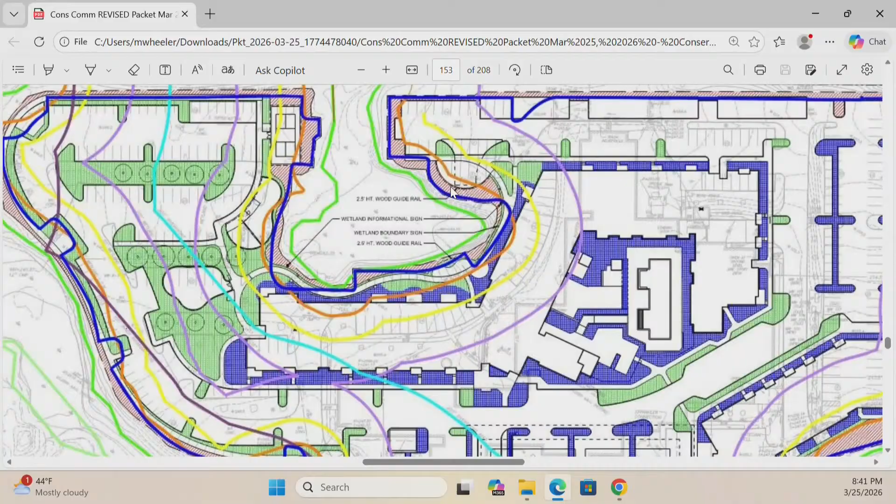Unrelated but related to the decks - is there anything in the O&M plan, on a schedule or as-needed basis, where someone goes out and picks up litter in the wetlands or cleans up? Yes, our O&M plan includes a section on vegetated area maintenance, which covers that as well as removing dead debris and vegetation.

So a general spring and fall cleanup would also apply. I'm more concerned about non-biodegradable stuff. Yeah, it would include things like someone throwing a can of something, as opposed to dog poop which will degrade, or styrofoam, plastic bottles, stuff that blows around.

I know other Red Gate projects are always kept really clean, it'll be nice out here, but is it in the O&M plan? The difference between this and a regular home ownership project is that we will have on-site maintenance - one management company cleaning regularly and maintaining the structure. So it's not like relying on 300 homeowners or their teenage children to pick up trash in the backyard; a maintenance company takes care of all of that. The detailed plan for maintenance and cleaning of the resource areas will all be part of the maintenance plan.

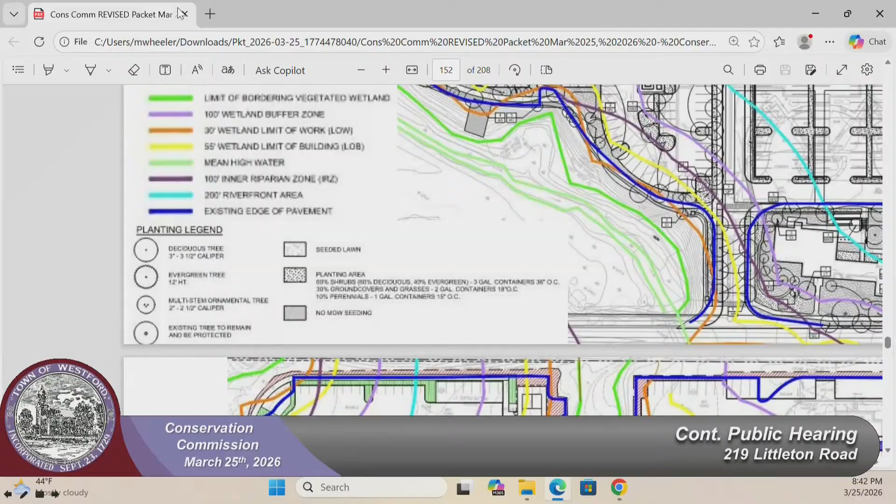The light green is marked as turf. Is it something beneficial like clover, or is it monocropping? From this group, the green itself is more of a turf-type tall fescue grass mix blend. It won't be just turf-type tall fescue, there will be other mixes in there.

Likewise, the blue you're seeing, most of it closer to the building, will be more of our shrub ground cover understory planting. And what you're seeing in that brown area would be our no-mow seed areas, which we've coordinated with basically the limit of disturbance with the civil plan.

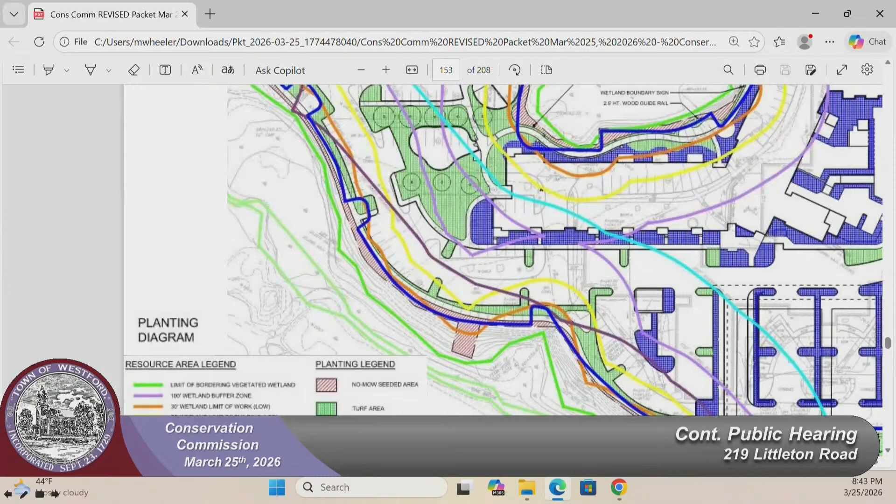So why are some of those, like that blue one - here it has two little greens - why not just make it all blue, or have those other little greens poking out be blue? Can you walk over and put your hand where you're talking? You're talking about right here.

Like these two greens - having those greens be blue instead of turf grass, which in theory is for people to walk on. Yeah, we're honestly just trying to find a balance. If it's really important it's not a big deal to grab those, but we're trying to find a balance.

So between those little fingers of green? Yeah, those are tree islands. So there's parking spaces between those? Yes. That gives us the ability to get those canopy trees a little further from the building, but it'll also give us a larger canopy, which helps provide more shade onto the parking spaces and minimize the heat island effect.

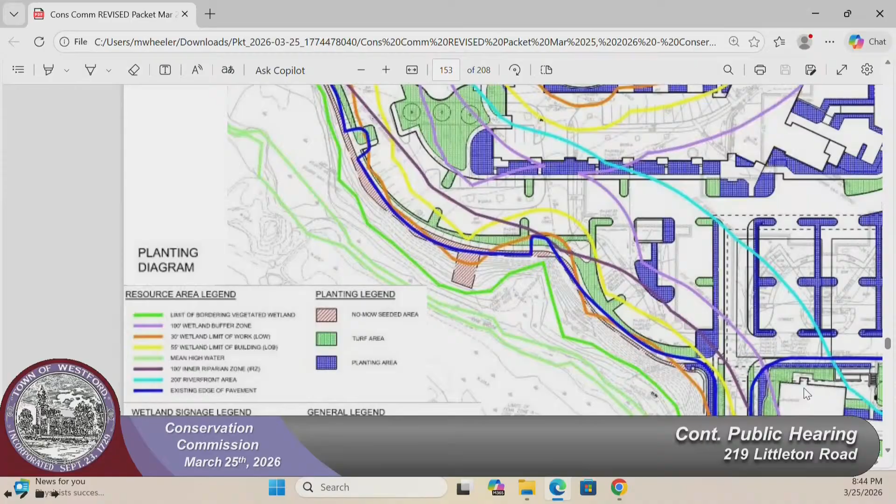If we went down to the last page, there are also details of what goes into those trees - yes, we have not gotten to that level yet, we're just getting into what the mix is. We put a list of the proposed plants for that understory layer, Margaret, but we don't have quantities and specific things broken out yet.

Well, I was just thinking in terms of the no-mow seeded area and the turf, whether there was any level of detail about that. There is - within that list there's a blocked-in area that shows you the mix.

That's at the moment proposed. Okay, so we have a preliminary look at what those contain. Absolutely, it's a mix of probably 12 or 15 native species right there, but that's definitely on that last sheet.

Okay, this plan is not showing the trees, right? This one isn't, this was just simplified, based on the request to say where's the turf, where's the no-mow, and where's the planting.

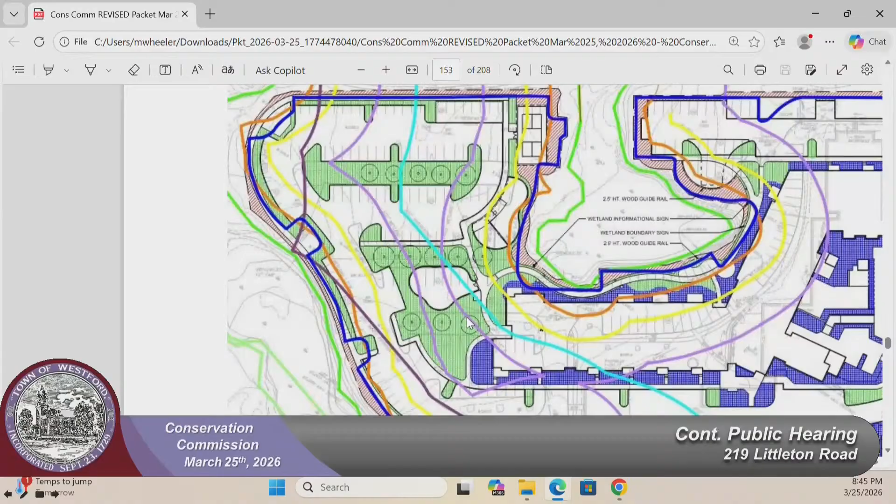Okay, it's a plan before that shows all the proposed trees. Yes, right? Yeah, so that's got all the labels and the tags.

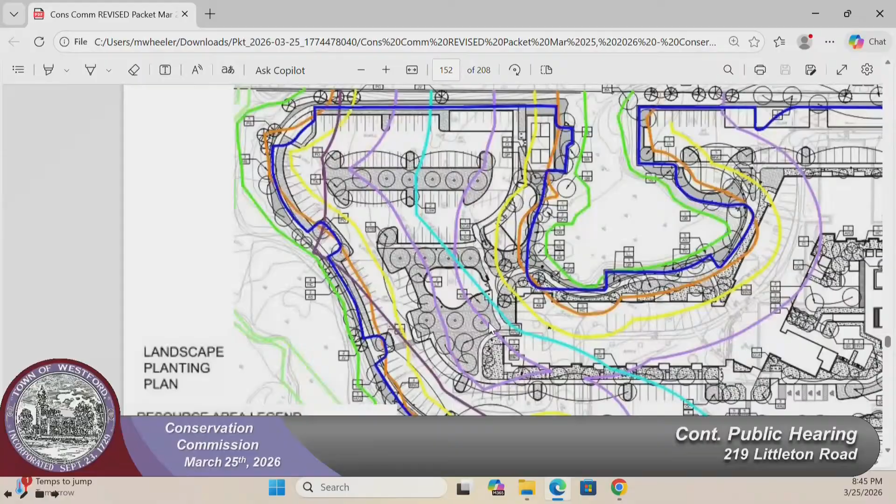And then I can go through one other thing if you want, kind of based on what we heard two weeks ago, I guess we were here. We obviously removed the walkway behind Building B, as we were talking about earlier, and what we proposed...

Margaret, I'm sorry, I'm probably going to make you - is it easier to go to the colored rendered plan? Yeah, all the way down. If you go to the first one that Bridget had up, sorry. I thought you meant the cut sheet. If you go to the site plan rendered, that may be easier because we can zoom in. Yeah, go up one more without these lines for the moment. We can come back to this.

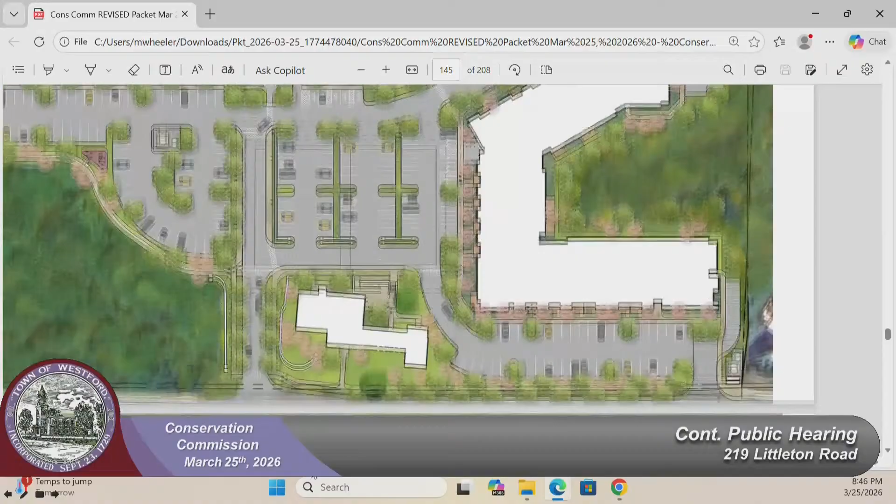Okay, yeah, now if you look, if you pan down so we can kind of see behind Building A, the upper one. Yeah, oh yep, there we go. And maybe is there a way to scooch that whole thing a little bit? Yeah. I'm sorry, no, there's a screen and I couldn't make it go down. So we're stuck on the wall. Let's see, is it - there we go.

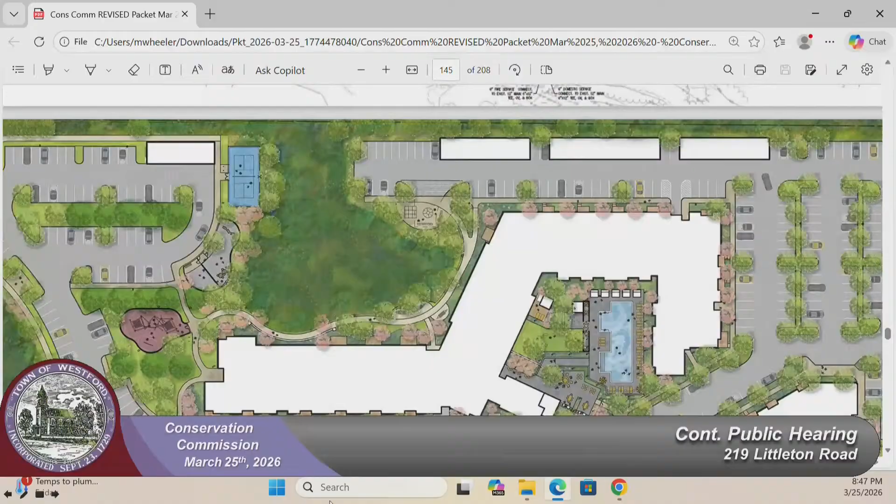Okay, so last time we were here with you guys, we had a path that went on the back side of the garages, and it ran right here and looped around. It was kind of our edge, and what we heard from the last meeting, certainly behind Building B, was concerns of proximity. We also talked about fencing, keeping people out of the wetland. So we looked at this, and in this scheme we moved that walkway, hugging basically the parking edge. Our new route for any of these people will be here. The loop that we had shown you guys now will essentially do this, and this is about a half a mile, and it'll wrap around. But the big move was really starting to move this walkway here.

So we will have an 8-foot tall chain link fence around the pickleball court. We will have a 4-foot fence around the dog park. And then we still have the playground right here, which likewise will have a 4-foot tall fence. So we're curious - we felt like this was getting us to a better move to move the people away from this nature edge.

And then I think somebody sent us a comment, or it came through Matt this afternoon or late yesterday, about a concern with the dog park here and its proximity to the wetland. So we wanted to talk with you guys about whether something would be more amenable - to take the dog park as shown here and flip it to get it in this location, and then bring the playground up. So you're basically flipping those units, or uses, to get the dog area a little bit further away from the wetland itself.

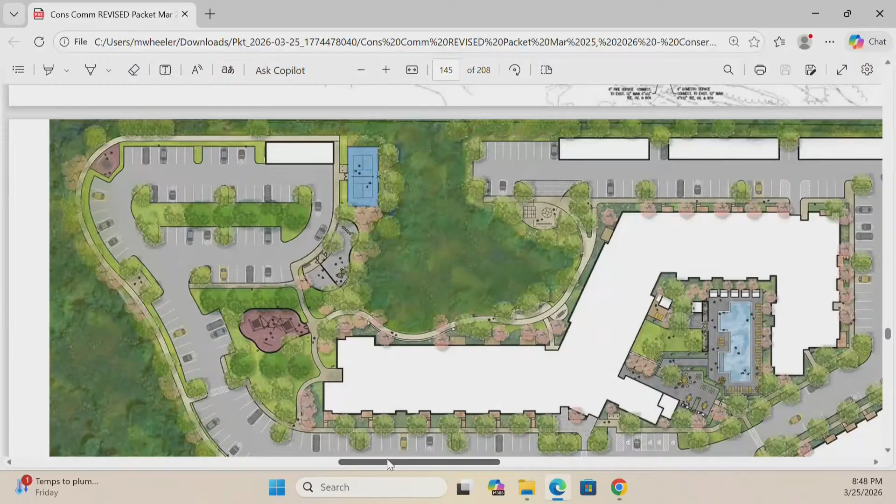So we kind of did this because we thought we were hearing you guys, so we wanted to make that change. And I like that idea, I like the idea of flipping it, and my reasoning is thinking about boisterous dogs right next to a walking path. I'm almost thinking that if you're walking along a path and there are medium to large sized dogs running around and doing stuff, there may be some people who are uncomfortable walking close to that type of activity. But it's fenced.

It's fenced, but my neighbors have a fenced backyard, and when I walk down my driveway, their two large dogs will be standing at the edge of the fence, barking at me, running along. The hair stands up on the back of my neck. Thinking about the mix of people here, with small children, having less of the walkway near where dogs are supposed to be out burning off energy might make it a little more comfortable.

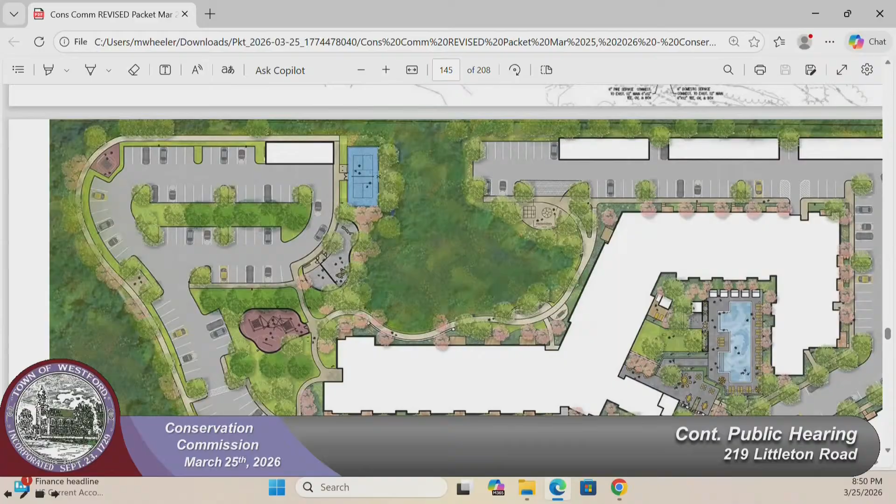Part of the reason I advocated for moving that path was we saw that with the limit of disturbance, it was getting close to the wetlands because you needed to do grading so the wellness path met ADA grades. My thought after the meeting was, since the path on the east side is near the pavement, could you do that on the west side so you're not having all that disturbance further into the wetland buffer just to get the grade? By flags B129 and B130, the red limit of disturbance beyond the pavement went all the way practically to the wetlands edge, and when I asked, it was because the disturbance was needed to make grade for the wellness path. So is this changed from what you had in mind?

No, I like this. Good. But because my feedback went through Matt and not through this public meeting, my fellow commissioners didn't know what my comments were.

So anyway, what are people's thoughts about swapping the dog park and the playground area and the other components of what you're seeing here? That makes sense to me. So you're supposing we put that playground area near the wetlands edge? If we flip it, right now I've got the dog park there.

How close was that edge of the dog park to the wetlands edge? It's right at the 30-foot line. So you'd have the playground with maybe some portion of it inside the 30-foot, and the dog park would actually be partially outside the 100-foot.

What would the surfaces be on those two areas in terms of perviousness? What's the ground like? For the dog park, that would be pea stone, so it would be very permeable. For the play area, budget allowing, we're showing a rubber resilient surface, which is spongy, and water can move through it with an aggregate base underneath. So it is permeable if you look at the product cut sheets, but it gives us a really safe and low maintenance surfacing.

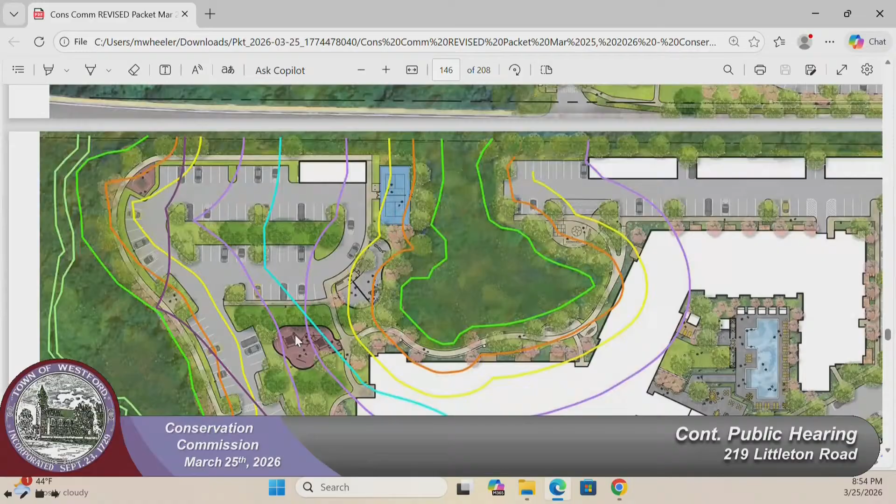We'd have heartburn if it was within the 30. We should manipulate that shape to get it out of there, Eric, that's a good point. Especially since we're flipping it, and this is supposed to be more of a nature play area, so we can work with that edge on the revised set.

I get the corner of the pickleball court, but that's good to have out there. As far as being able to have some flexibility with the kids' play area, that's fine.

Yeah, I know it's still in that corner area, but if it makes a difference, we made sure that the corner did not encroach outside the currently paved parking lot. Appreciate that it makes a difference. Okay, it does.

Not that it's germane to the Conservation Commission, but we did roll it out to the planning board that all of these amenities will be open to the public. The pathway and all the amenities, the pickleball court, the dog park, and all of that will be open to residents of the town of Westford, not just the residents of this development.

That'll be pretty interesting. Good luck with that. I don't know how you're gonna monitor that one. The town will finally have a dog park.

Yeah, dog park. The pickleball, you said the fencing is 8 feet? Yes. Is that standard? Yes. Because where I played in Brussels, it was at least 10 or 12. If you're more of a pro level, the ball would go out 7 times a day.

So I could see it going out into the wetlands. You're gonna need somebody to chase it, and people trampling in the wetlands. Something to consider? Yeah, you'd put a higher fence on that side, on the east side of the courts, and maybe the back end there, the north side.